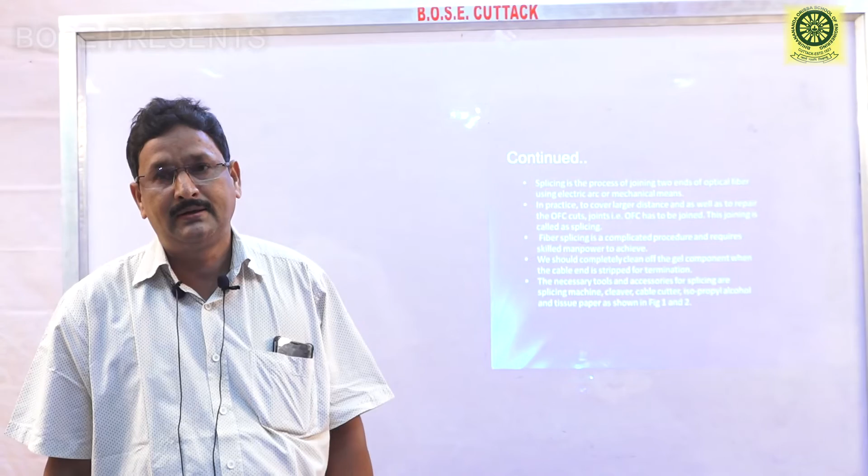I am Sishir Kumar Sahu, lecturer in Applied Electronics and Instrumentations. My subject is fiber optics instrumentations. My topic is the leftover course which was not covered due to the lockdown period, that is fiber optical splicing.

Today we will know what is splicing, what do you mean by splicing. We will discuss about the splicing and various steps taken for splicing.

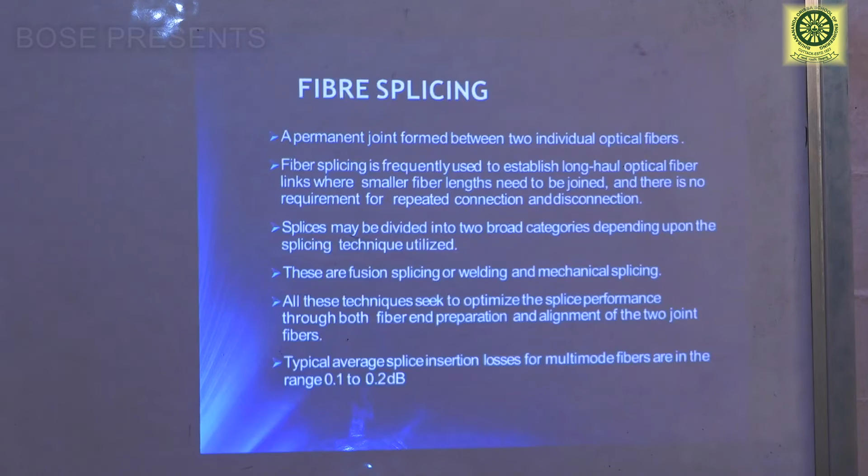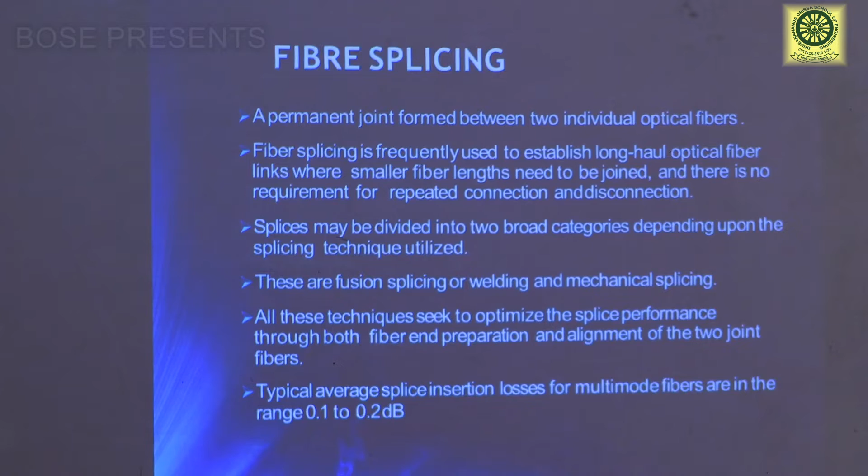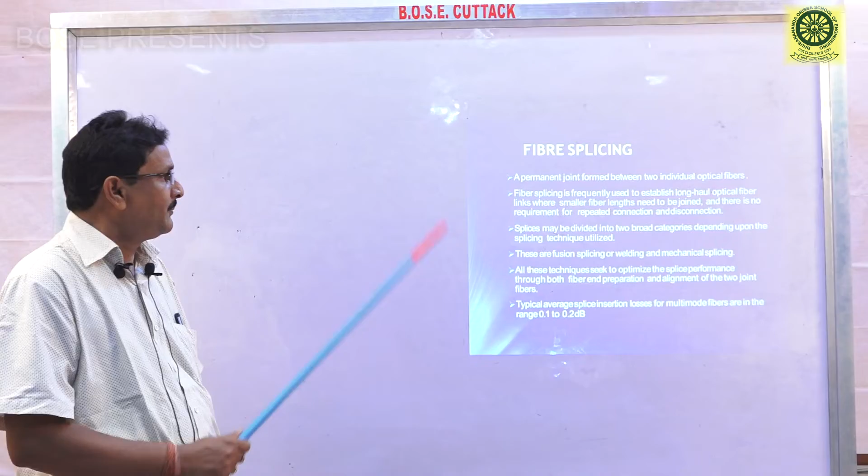Fiber splicing is a permanent joint formed between two individual optical fibers. As you know, optical fiber is required for communication purposes. For long distance, to spread the optical fiber, we want to join two optical fibers. Fiber is made of glass and it's like hair. So for forming that, it is frequently used to establish long haul optical fiber links. That means why it is needed?

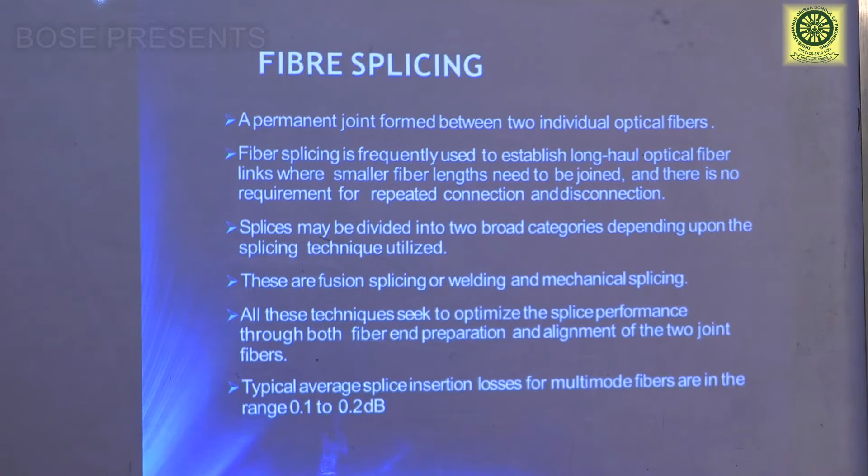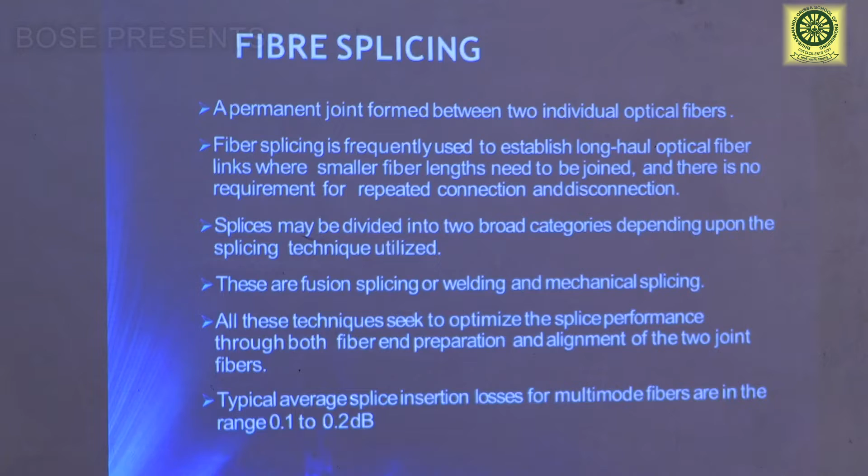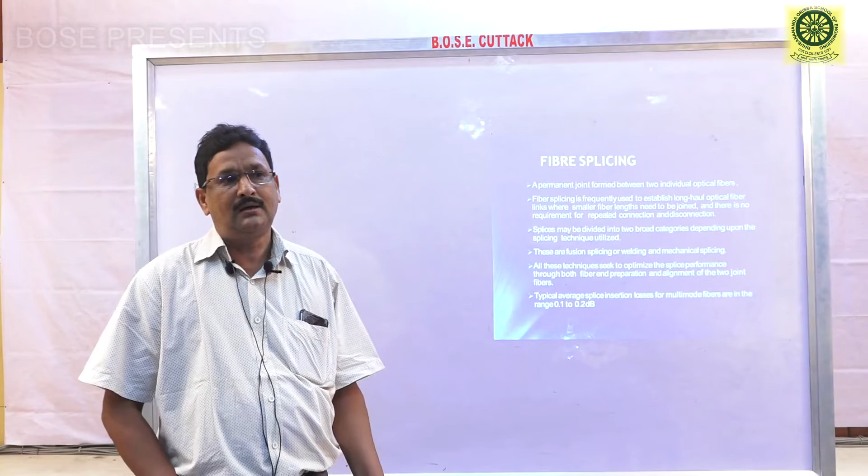It is needed to establish long haul optical links where smaller fiber lengths need to be joined, and there is no requirement for repeated connection and disconnection. Its main advantage is that it is not required for repeated connections and disconnections, so we do optical fiber splicing for long haul link establishment.

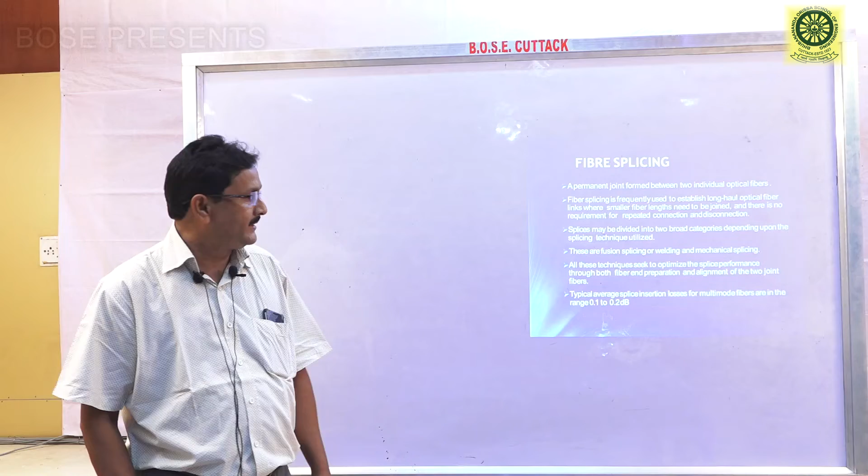Splices may be divided into two broad categories: one is fusion splicing and the other is mechanical means. Fusion splicing or welding, and mechanical splicing.

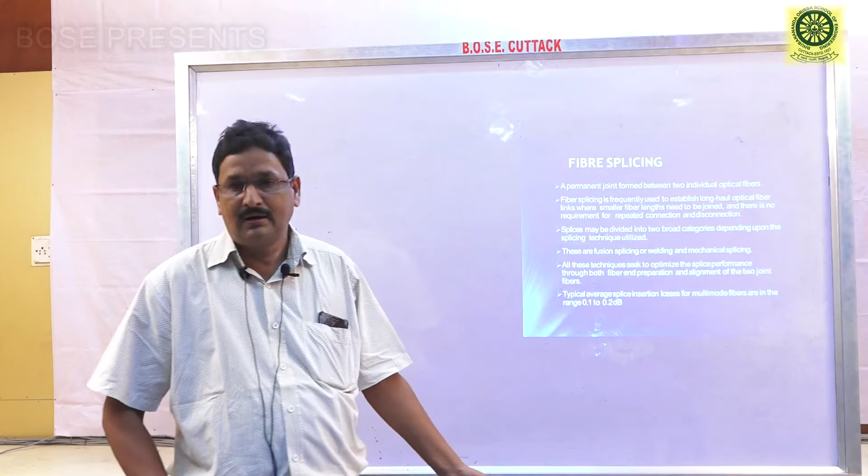All these techniques seek to optimize the splice performance through both fiber end preparation and alignment of the two joint fibers. What do you mean? While we are joining two fibers, that joining should be aligned.

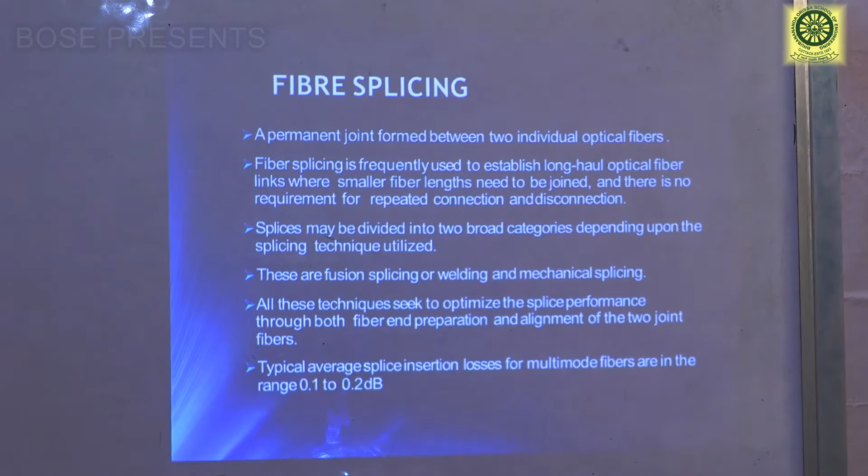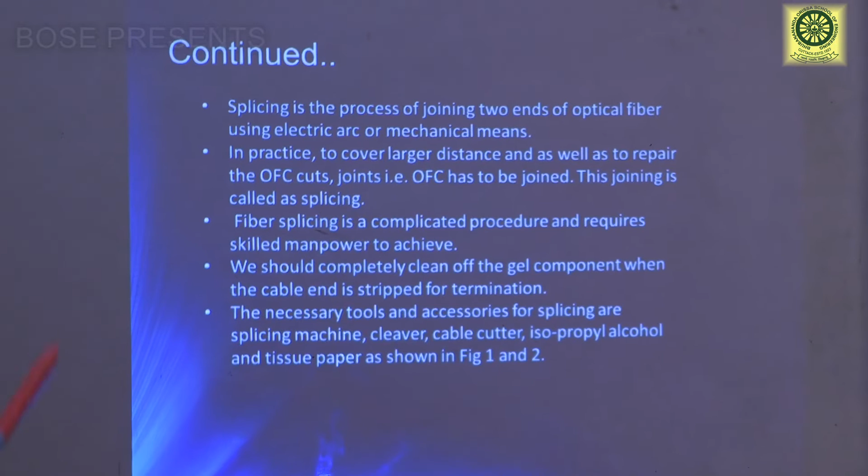Another thing is that its insertion loss is very less, between 0.1 to 0.2 decibels. That's splicing, the process of joining two ends that I have already told you, and it is done using electric arc or mechanical means.

Electric arc means the fusion technique. Splicing is a complicated procedure requiring skilled manpower. For doing that splicing, the person splicing should be a skilled person, otherwise accurate splicing cannot be done and communication losses will be there.

We should completely clean up the gel component when the cable end is stripped for termination.

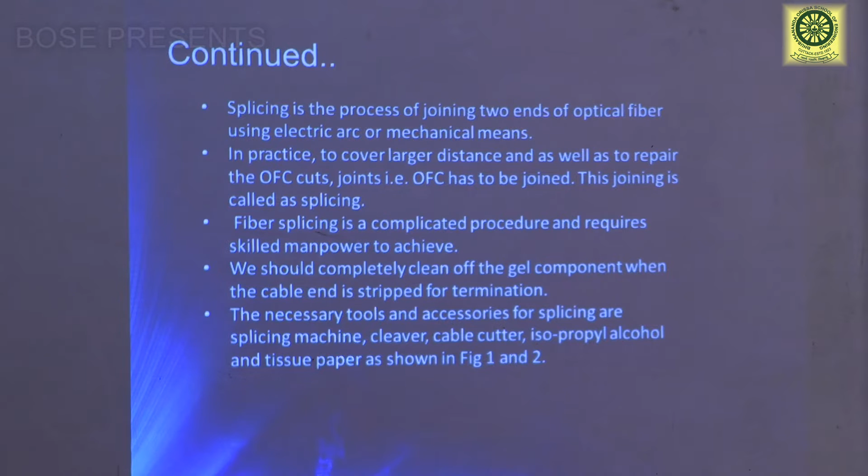When we terminate the cable end, we will clean the end of that cable completely. Then the necessary tools and accessories required for splicing include the cleaver.

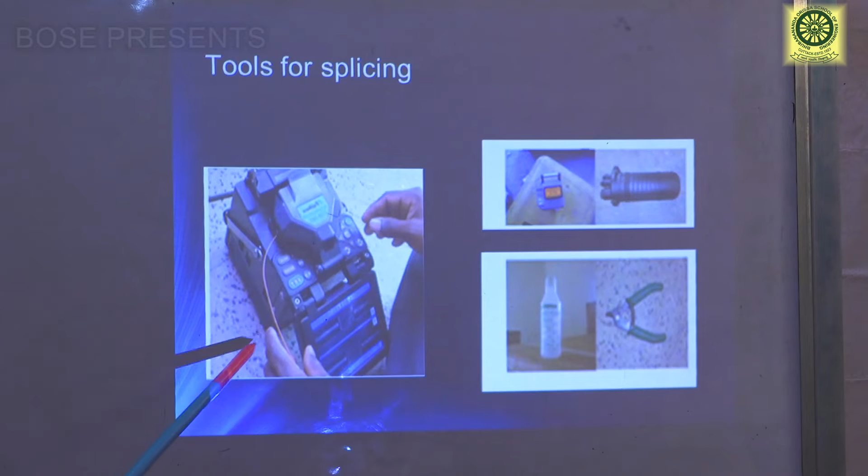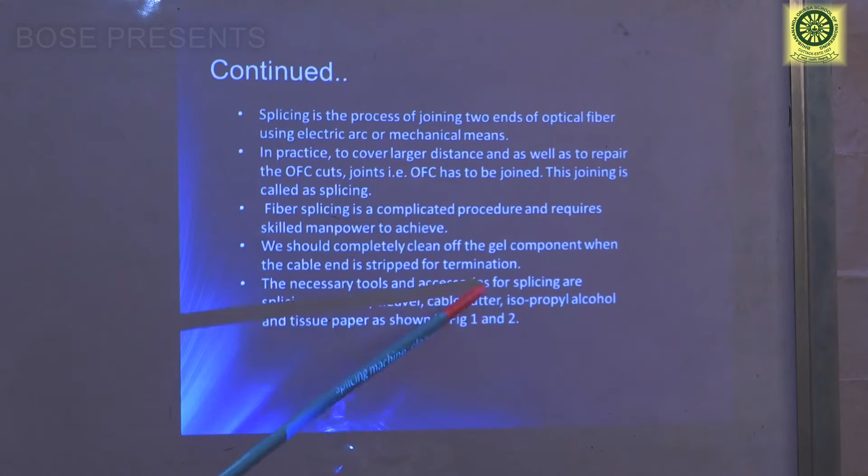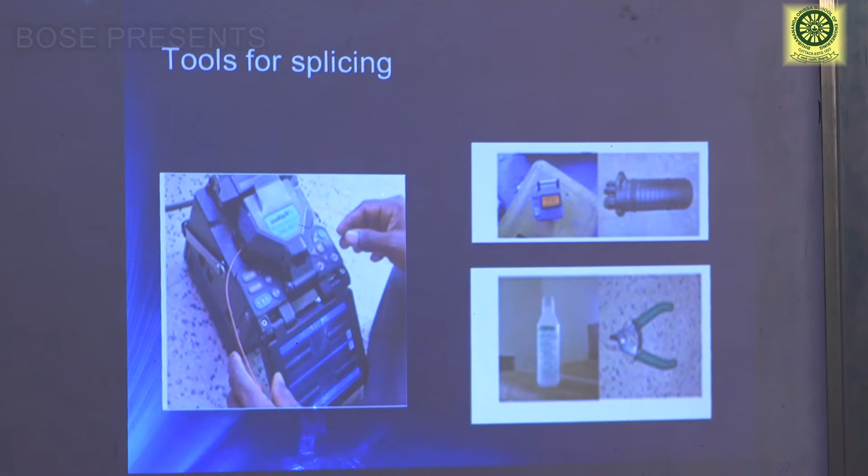These are the tools for splicing: this is your splicing machine, this is your fiber cleaver, this is your cutter. The accessories are the splicing machine, cleaver, cable cutter, and isopropyl alcohol, as shown in the figure. This is the machine, the splicing machine, this is the alcohol, this is the cutter, and this is the cleaver. These are the tools required for splicing.

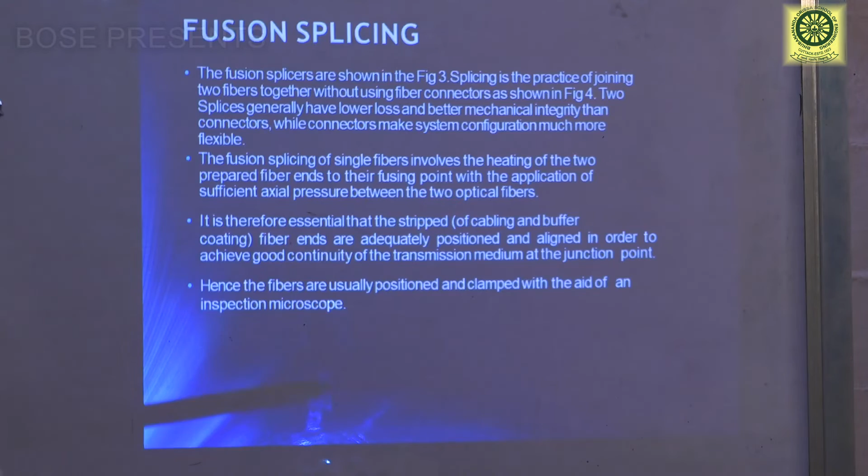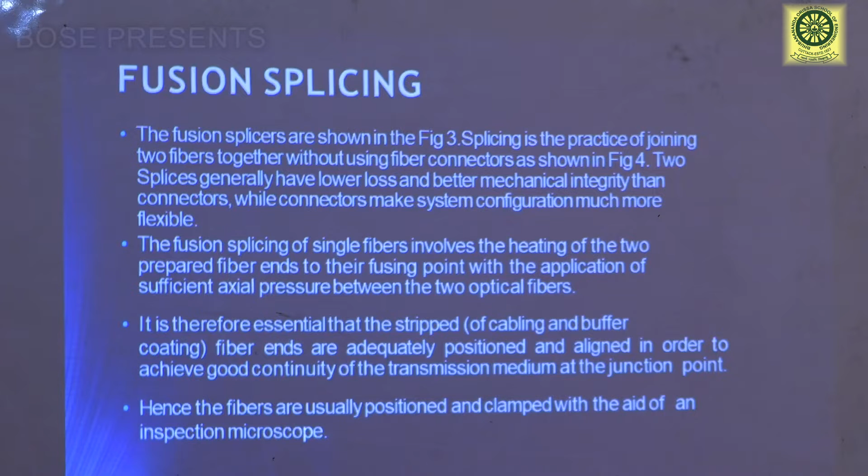What is fusion splicing? Fusion splicing is when the ends of the fiber cable are heated to the extent of its fusion point, as shown in the figure of fusion splices.

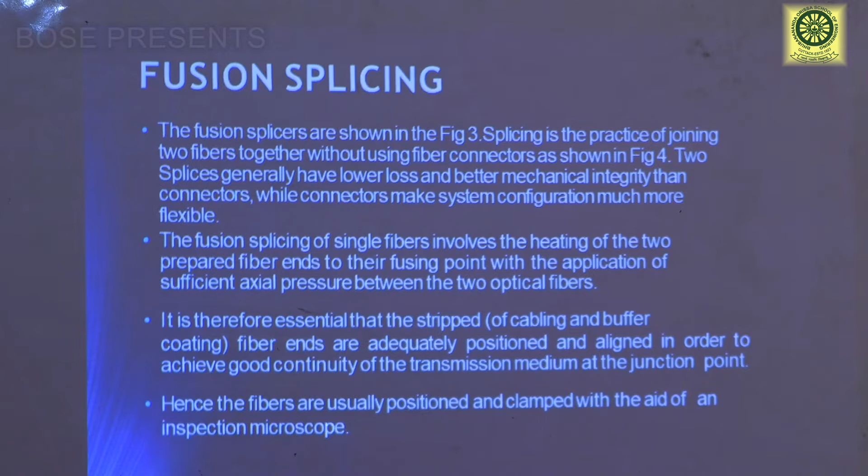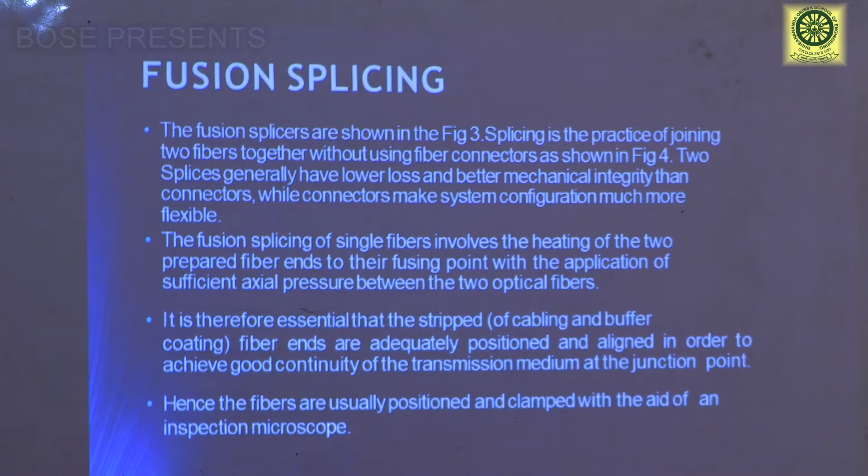Splicing is the practice of joining two fibers together without using any fiber connectors. Its main advantage is that we are not using any fiber connectors to join both fibers, unlike joining a water pipe with connectors. While joining the optical fiber cable, we are not using fiber connectors; instead, we do it by the fusion technique and mechanical means.

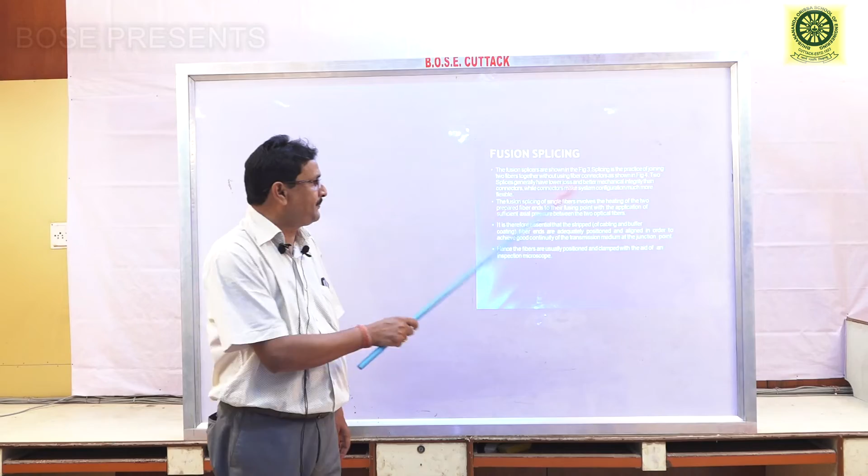The fusion splicing of single fibers involves heating the two prepared fiber ends. First we prepare the two fiber cable ends, clean them, and align them in a machine. After aligning, we heat the two ends of the prepared fiber to the fusing point with the application of sufficient axial pressure.

Between the two optical fibers, while heating the prepared ends, it will be heated to the extent of the fusion point of that fiber, with application of sufficient axial pressure between the two optical fibers. That is the main thing.

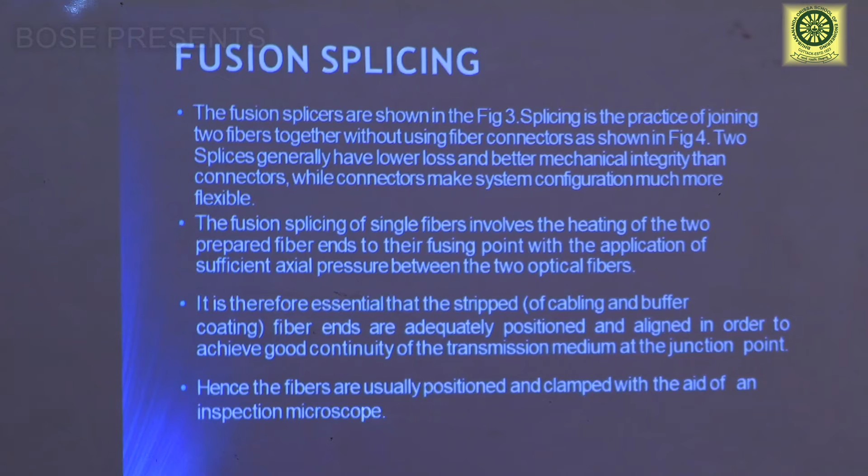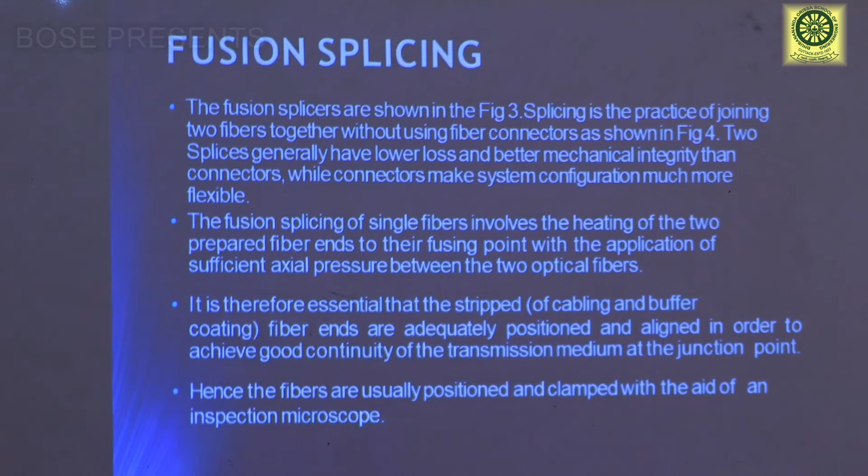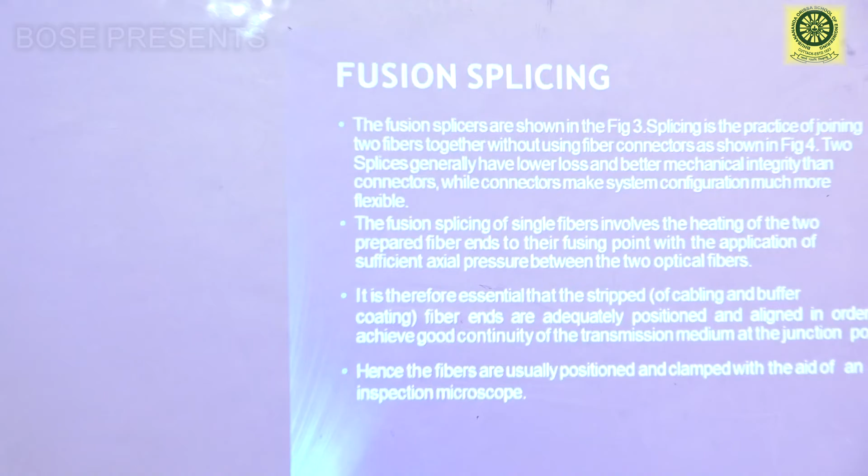It is therefore essential that the stripped ends of cabling and buffer coating fiber are adequately positioned. By this technique, we position the ends through alignment to achieve good continuity of the transmission medium at the junction point. If we align and heat the two prepared ends of the cable to the extent of the fusion point, it will have good continuity of the transmission medium at the junction point.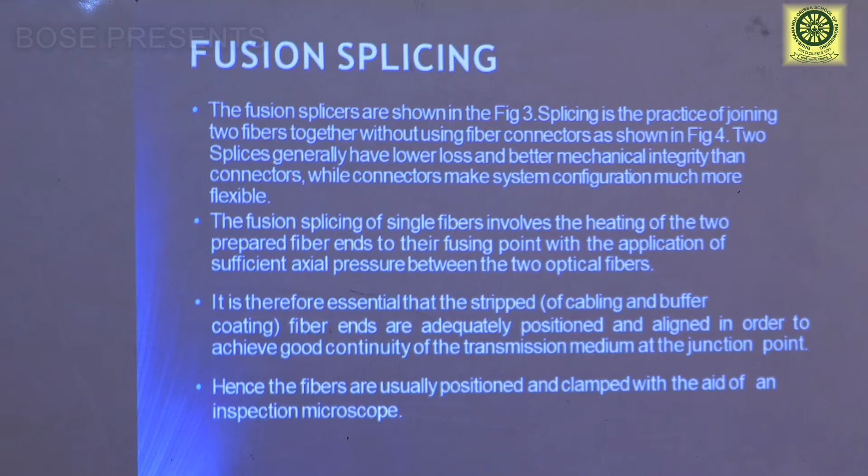Hence, the fibers are usually positioned and clamped with the aid of an inspection microscope. Because I have told you, it is made of glass and is like our hair, so that microscope is used for positioning the ends of the fiber and also clamping the ends of the fiber in an optical fiber machine.

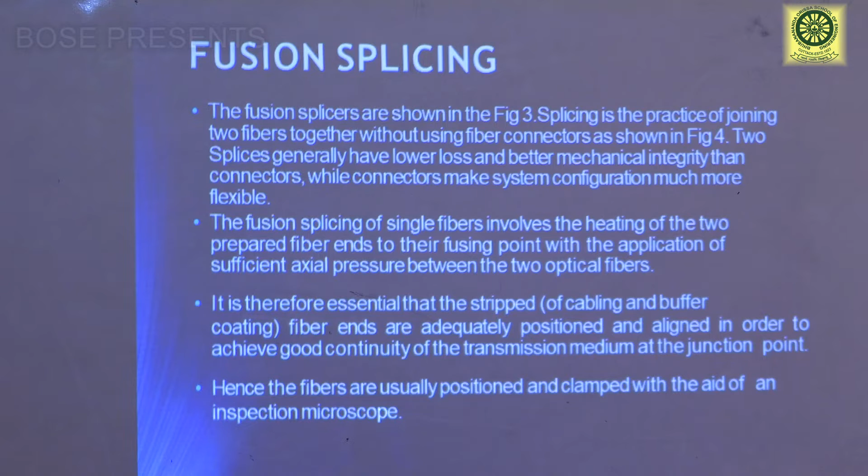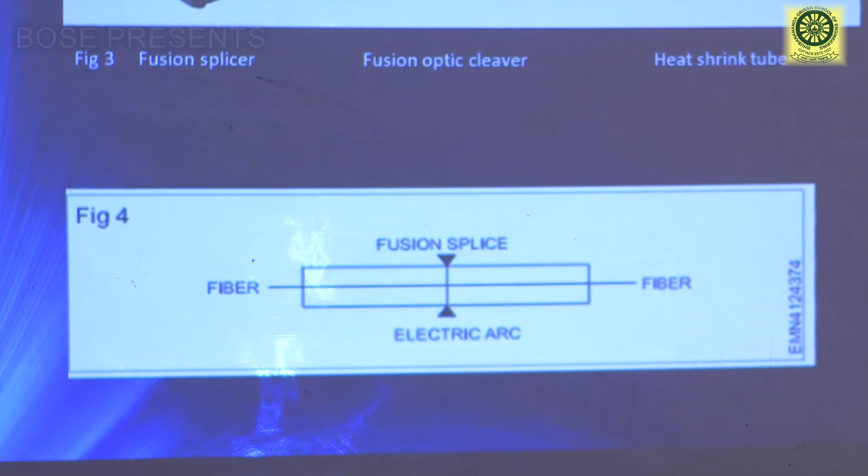Next we have the fusion splicer, fusion optical cleaver, and heat shrink tube. This is the electric arc we are giving here for the two ends of the fiber to be joined, so that a permanent joint is formed between two individual fibers.

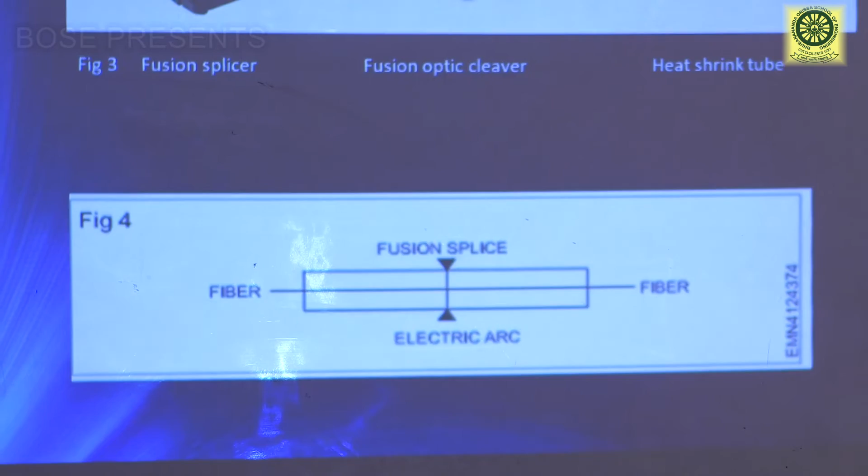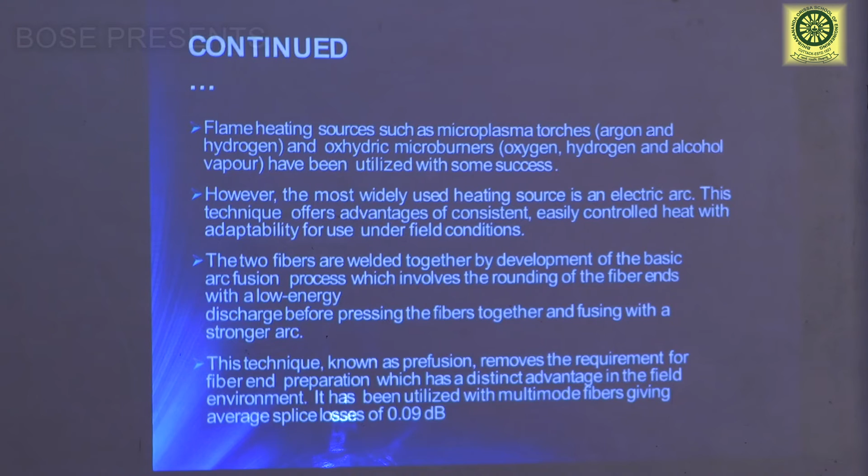Next, there are other flame heating sources such as microplasma torches, argon and hydrogen, oxyhydric microburners. These are for heating the two prepared ends of the optical fibers.

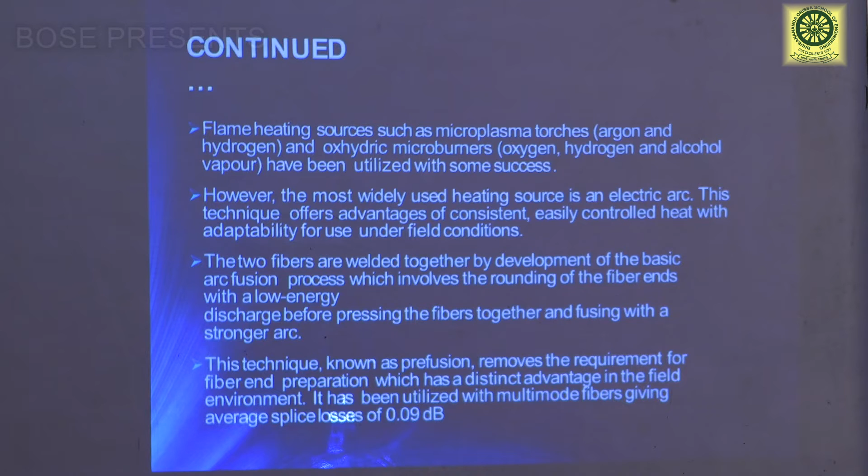Another method is applying the electric arc for heating the two prepared ends of the optical fibers.

Next, there are two methods, two techniques: one is fusion splicing, another is mechanical splicing. Mechanical splicing means fibers are held in alignment by some mechanical means, just like while doing a job in a mechanical workshop, that job is put into a vice for working on it.

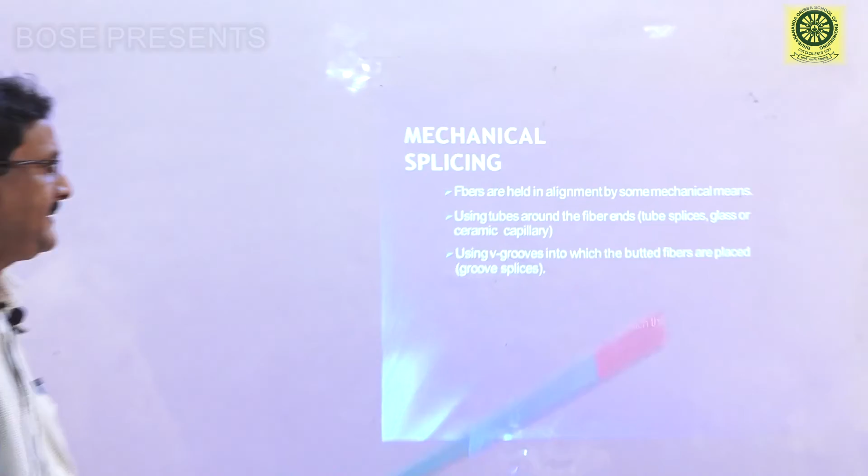Then we are using tubes around the fiber ends, tube splices, glass or ceramic capillary, also used for mechanical means. Using grooves into which the butted fibers are placed are called groove splices.

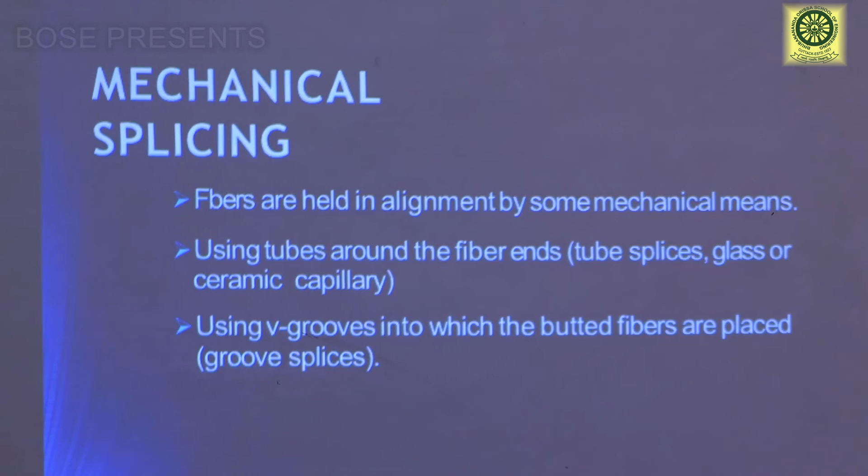Fusion technique and mechanical means are used for joining two ends of the optical fiber to establish fiber links over long distances, and we may also need to repair some cutting points or joints using this technique. For cutting of the fiber cable, we use this technique for joining two optical fibers.